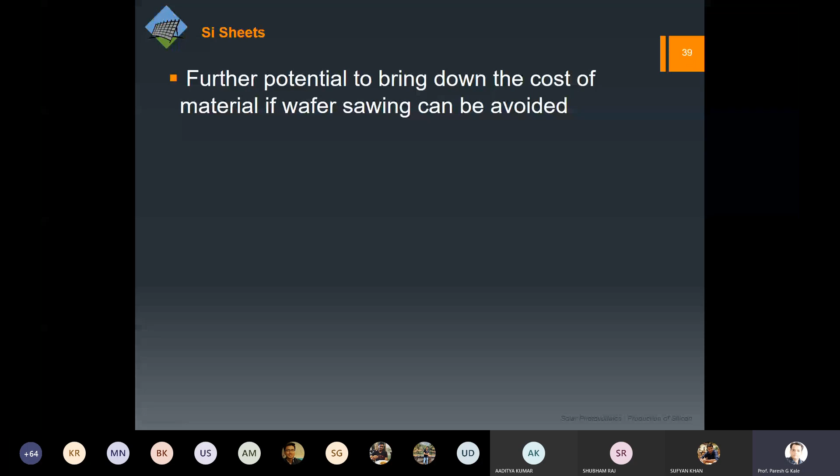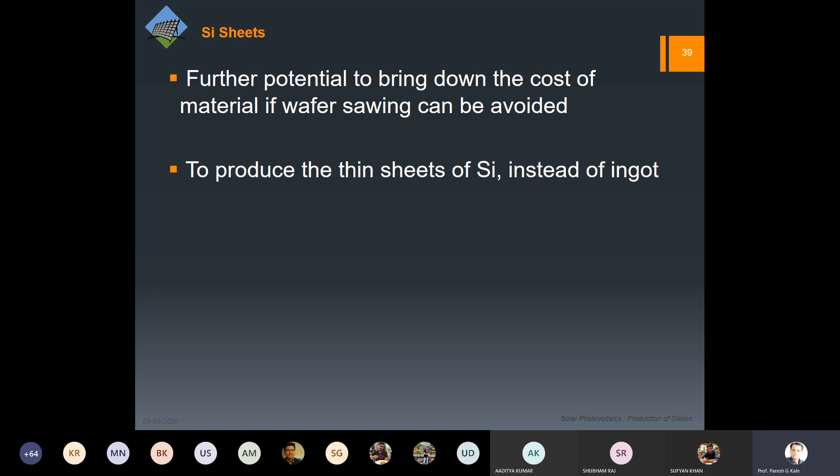So there are many methods available. People tried all sorts of things, but the point is that we were growing the sheets. The first two methods are literally growing the film. However, here the third one, you are making the sheets from the powder.

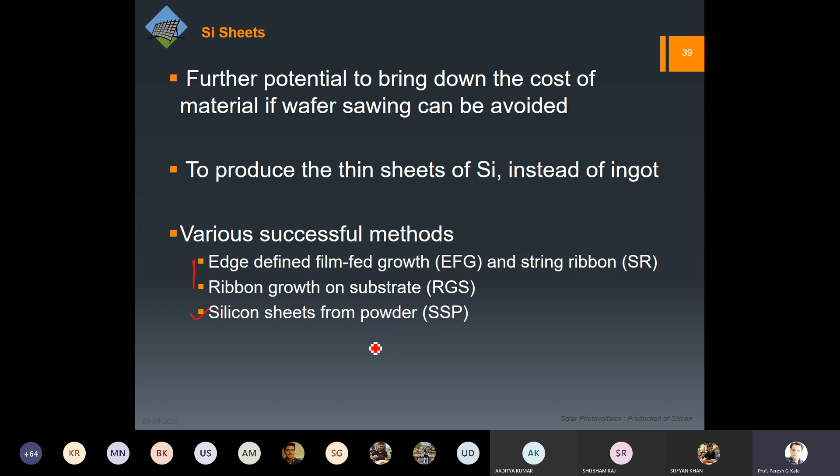So I told you, when this silicon wafer is cut, there is a kerf loss, which normally would be a powder. So with that powder, people were making the sheets. Let me show you a quick review of this.

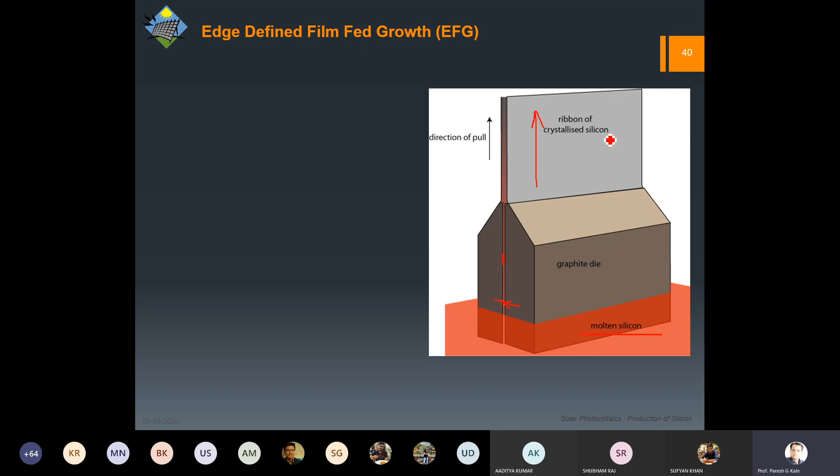This is edge-defined film-fed growth. Obviously we need molten silicon in pure form. However, we want a long sheet, so it is something like spooling. You have got a graphite die with a very small entrance or slit. So whenever you are pulling this molten silicon through this graphite die, you will have a very thin film of crystallized silicon. So this die is used.

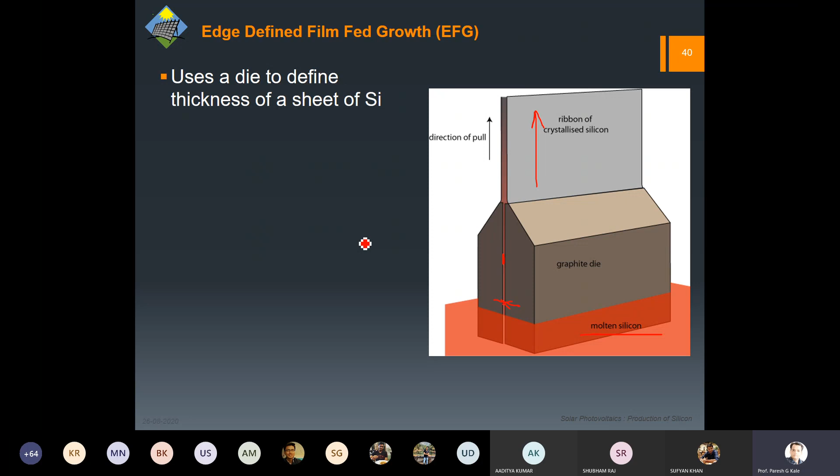So there is no cutting directly. The film is going up, and till you can pull a complete film, you can go ahead and have a large film.

However, the challenge here is the adjustment of the temperature profile, because here it is molten silicon at the bottom that we are pulling, and through this graphite there will be a gradient of temperature, and ultimately we have to cool it off. If you have learned some metallurgy, you will understand that this temperature-related process, sudden cooling or sudden heating, damages the microstructure of the material.

And during this process there go different defects, and also in this case it will cause the silicon which is crystallizing into the film to have large grains, a large number of grains. So all these things, the morphology and crystal structure of the material we are producing, are largely dependent on this transformation, translation in the temperatures.

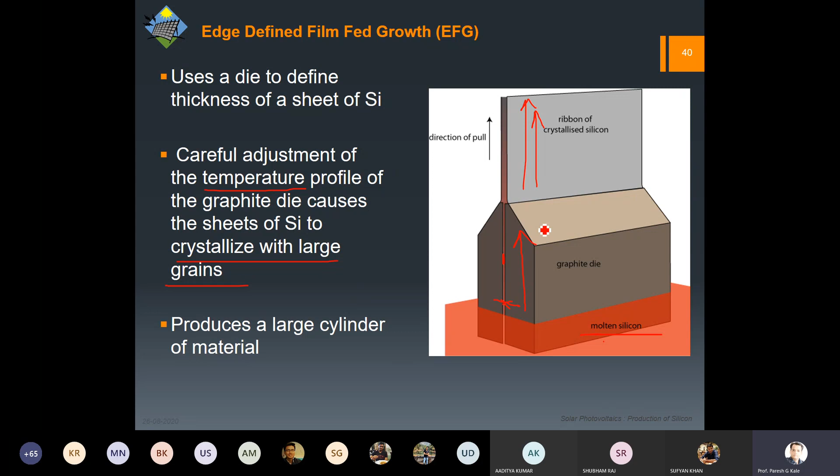However, it can produce large cylinder kind of material. I'll show you the picture here. You can see this is in 2D, so when we go for 3D, it is actually made in cylinder shape. What you have is a hollow cylinder, and you can see only thin shapes are there, which we can cut, provide flattening, and then use it as a film.

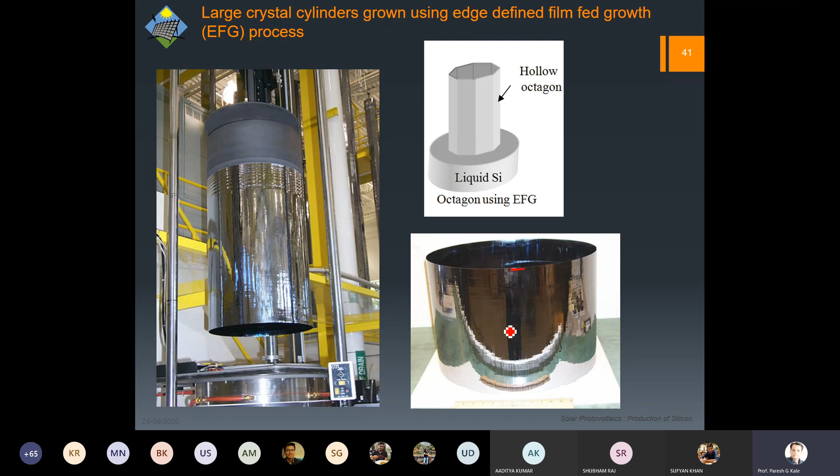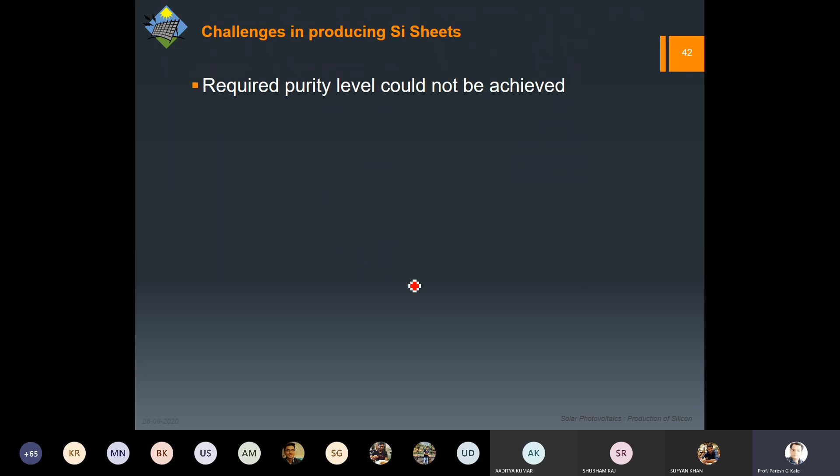So the challenges are: it requires a very high purity level which cannot be achieved because of this pulling process. Too many impurities are introduced by the apparatus itself, and many defects which create problems for efficiency are induced during the crystallization process.

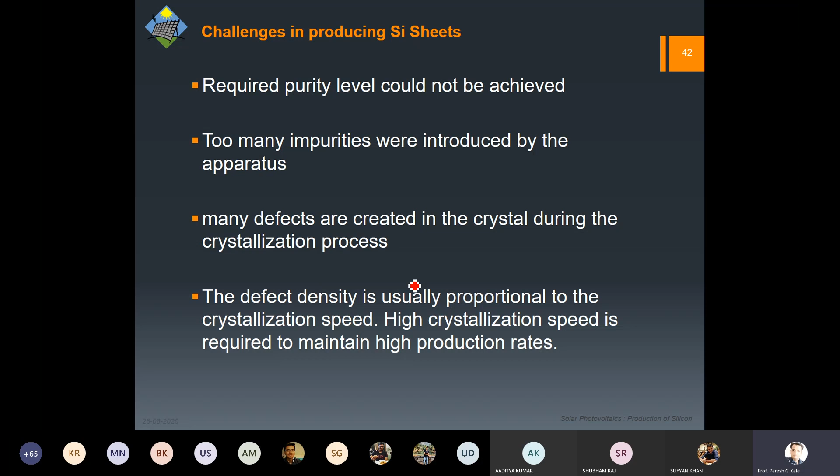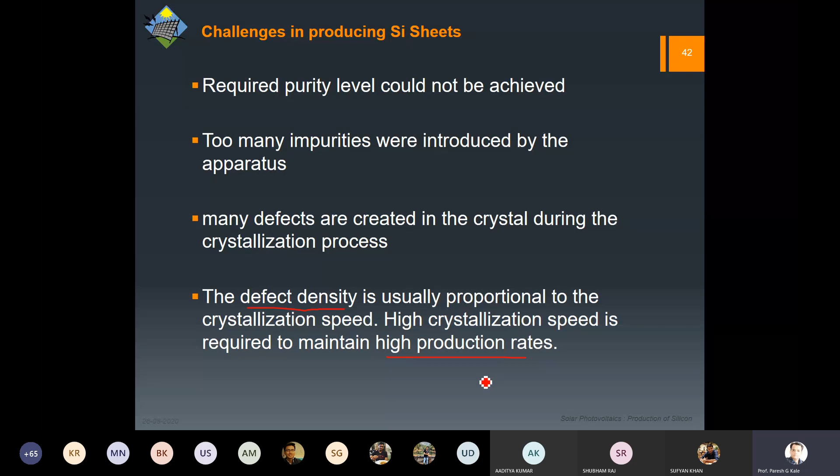And the defect density, as we have seen earlier, whenever you are making even the ingot, depends on what is the crystallization speed. There the crystallization was with depositing new silicon atoms on the seed, so something similar is happening here. It is again proportional to the speed with which I am pulling up the film. So if high production rates are to be maintained, we require high crystallization speed, and that is not going to happen - these are vice versa.

So these were the challenges, and that's why it was not too famous in the initial time. If you remember the graph from our first chapter, some time the production was increased, but then it proved out that it cannot be sustainable, and you really cannot bring down the prices. Rather, it's better to work on the monocrystalline or polycrystalline only. So still today more than 90% is dominated by mono and poly, not by this ribbon type and whatnot.

Other thing is the wastage itself. Now in solar cell industry, there are various places, various occasions where this wastage will be there, and at every stage we can send back that wastage for purification, or rather melting, so that it can be recycled in a simple sense.

Now the thing is, solar cell industry doesn't require much purified semiconductor, so obviously we can get that wastage from the electronic industry itself. Now you can ask me a question - why doesn't the electronic industry use the recycled one itself? Because whenever you are recycling, obviously new defects will be induced when you are processing.

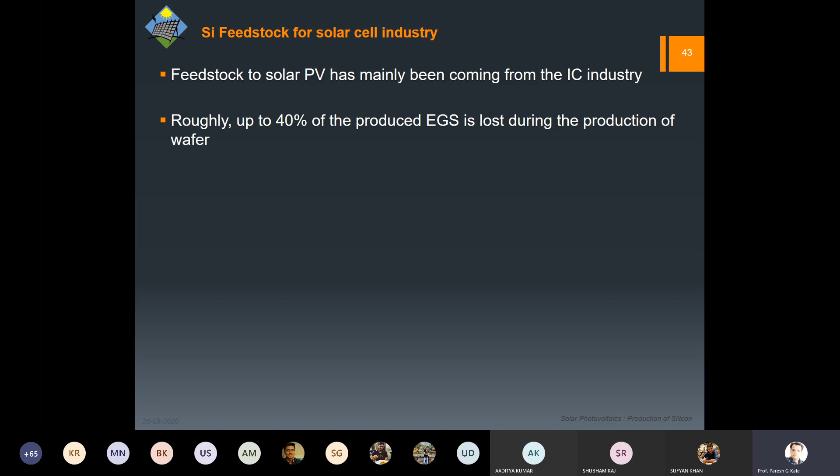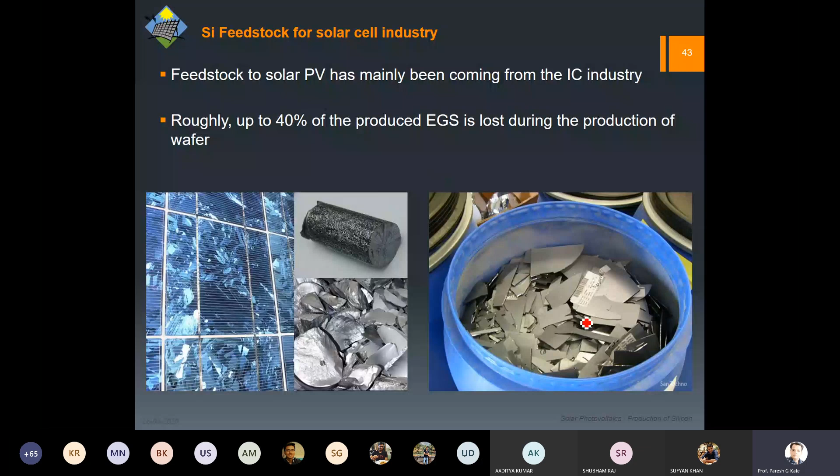It would be better to send defective material to the solar cell industry, where such defects can be accepted. In electronic grade silicon production, almost 40% is lost during wafer production. This includes material cut from the top and bottom of the ingot, and wafers that break during processing. All of this adds up to 40%, plus there are kerf losses, and quality control may also reject certain pieces.

So we can do that analysis. Let's say we have a given production capacity. I'm marking the steps in wafer making, and at every step, whatever is the wastage or discarded material, that is what I'm giving you.

When you are making polysilicon, you can have off-spec silicon which is not up to the mark—something has gone wrong with the process, doping may not have been proper, or some impurity is seen. These are discarded.

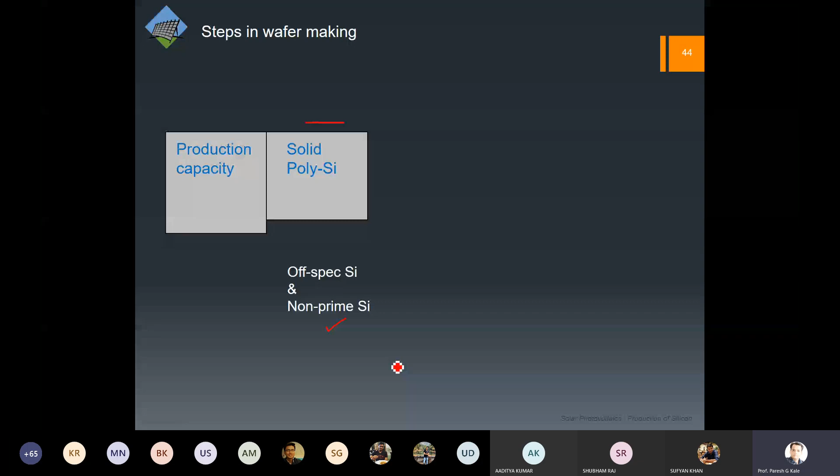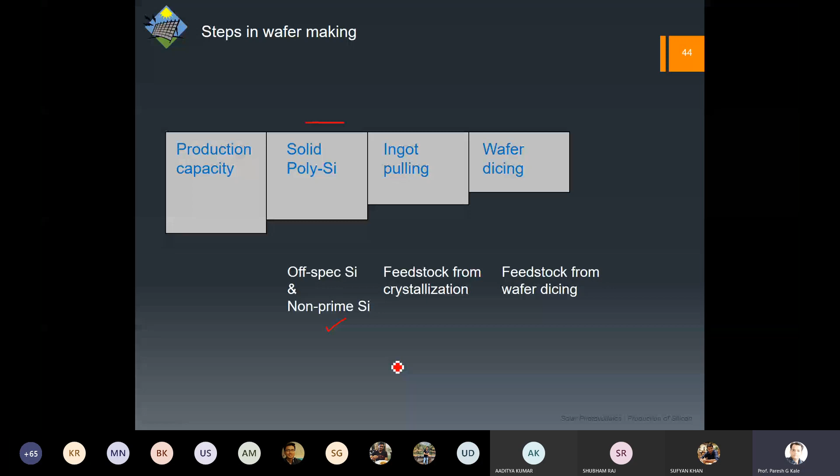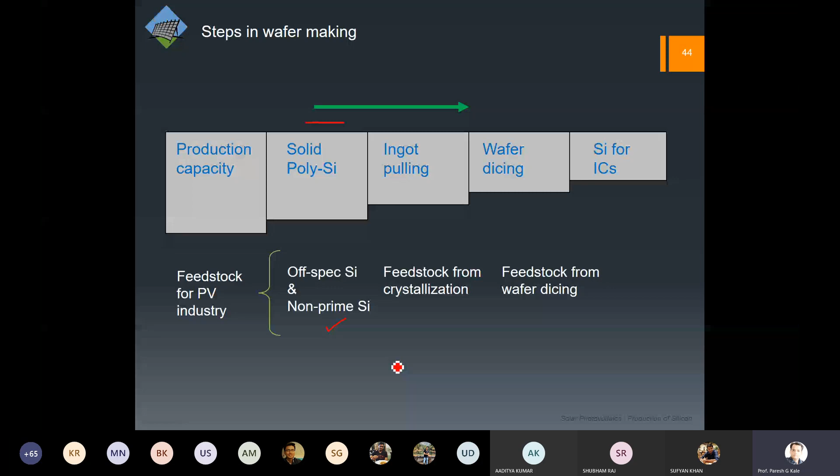Next, during ingot pulling, feedstock from the crystallization step can be given back. Then from wafer dicing, broken wafers or powder can also be given back. Ultimately you get silicon for ICs, but at every step, whatever waste we get can be used as feedstock for the PV industry.

That was for mono. We can go for poly as well—small chips and dust generated during the crushing process, then silicon deposited near the graphite electrodes. If you remember our reactors, some silicon is wasted, deposited inside the reactor itself, especially near the electrode, so that has to be scrubbed off.

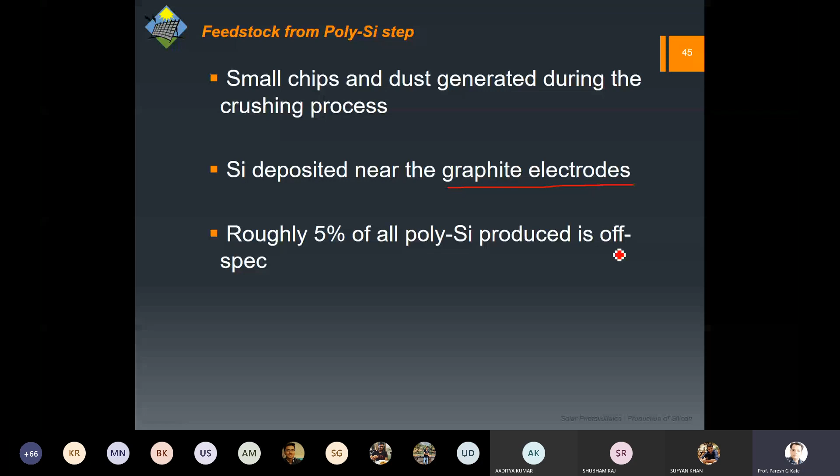But still it is much better compared to solar grade silicon. We've already discussed off-spec material. Then in FBR, some undersized beads and silicon dust is generated, which can also be utilized.

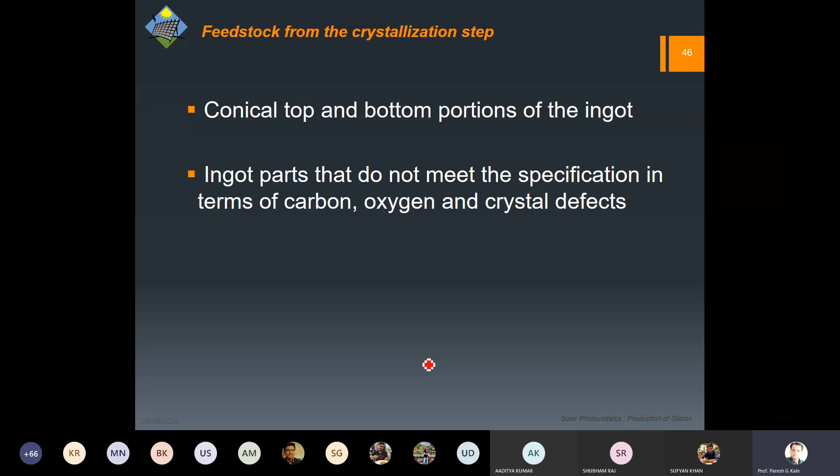Next is feedstock from the crystallization step—the conical top and bottom from the ingot, as I discussed, plus ingot parts that don't meet specification, for example defects coming from improper processing, or carbon or oxygen contamination. If there is oxidation, carbon can come from the earlier process itself. Then silicon remaining in the quartz crucible cannot be completely removed, so it's scrap, similar to what we saw from the reactor.

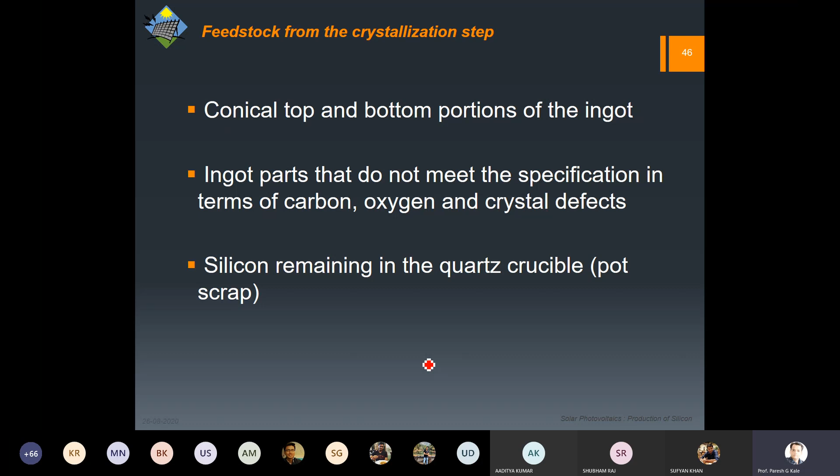Next is feedstock from the dicing step. Normally this yield is 90-95%, but wafers which are broken or damaged, out of dimensional tolerances, or warped or bowed due to heat treatments cannot be used for making modules.

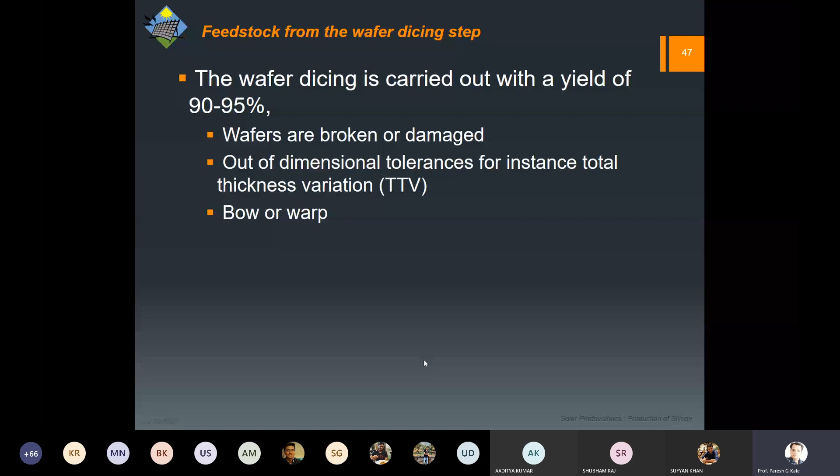This whole thing is always monitored for testing faults. Later, when we discuss actual solar cell fabrication, I'll explain how quality control is done—you can measure certain quantities, like the resistance in wafer making, and even find out where the defects are and how much the level of defects is. There are contactless techniques for characterizing wafers or solar cells.

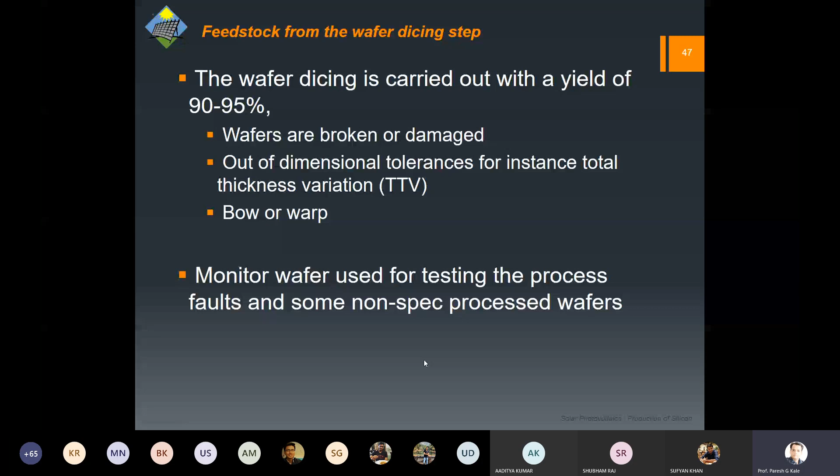We will have a separate lecture on that. You can have quality control at every stage, right from silicon purification to the solar cell, and even at the module level. So you test everything—individual cells are tested, and modules are also tested individually. We've already covered sawdust.

So the point is, when we go for solar grade silicon, it is less pure compared to electronic grade. Understand that monocrystalline is the best one, then polycrystalline, which has grains but is still high quality material. Solar grade silicon is much more impure compared to even polycrystalline. Polycrystalline has no impurity as such, but the grains decrease the efficiency—that is the whole problem. So we can take this as metallurgical grade, and this process is entirely different from whatever we have seen till this point.

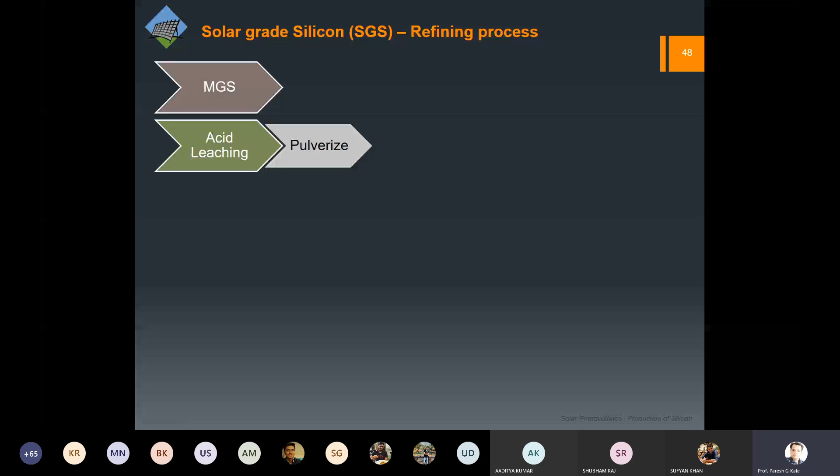So you take metallurgical grade, you don't go for ingot or something like that. You pulverize it so that most of the impurities would be removed with that acid itself. So you can see most of the metallic impurities are removed.

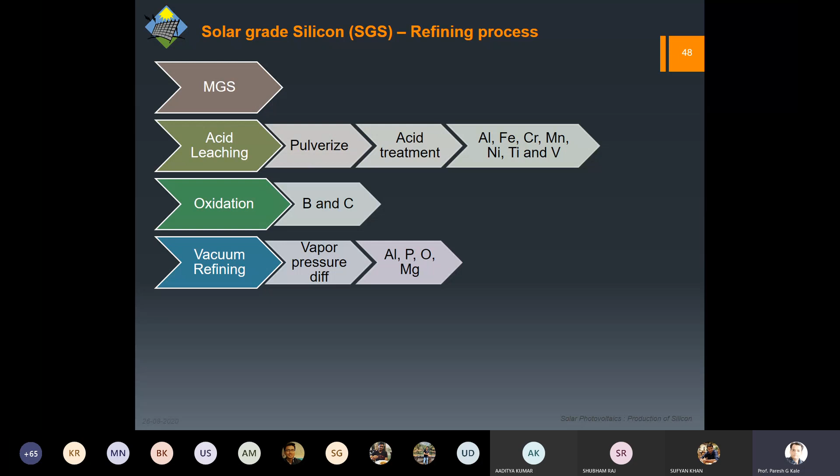Then you go for oxidation so that you can remove boron and carbon from that. Then you go for vacuum refining with the vapor pressure difference, and then you remove certain other materials like aluminum or phosphorus, oxygen, which is present from the previous steps.

And then ultimately the last process would be the solidification.

This process is important, and it is worked on something called as a segregation coefficient. We will see that there is something called as diffusion.

Every metal or every atom of an element will try to diffuse through the entire crystal structure of the material.

Let us say if there is some impurity, let us say phosphorus. Okay, so phosphorus will try to diffuse. This titanium will also try to diffuse out of it.

So whenever you are solidifying this metallurgical grade silicon, depending upon what is the segregation coefficient, these impurities are removed. The titanium will be removed faster, and all these metal materials have got a lower segregation coefficient, so that's why they would be removed.

They will automatically come to the surface. They diffuse from the inner side to the surface, and when you remove the surfaces, you treat the surfaces, the impurities are gone, and you can use this coefficient so that you improve or purify by this solidification.

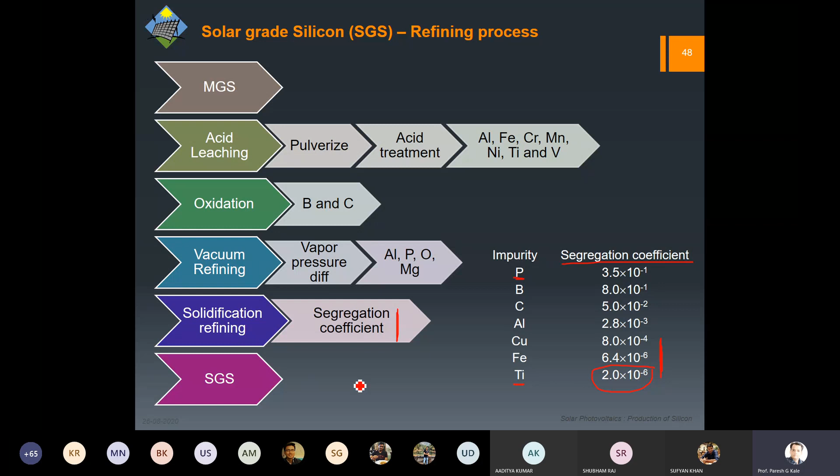So you can see here we are not going for the processes like earlier, but it is on similar lines. And of course, you do solidify so that after that you go for slicing in the way you want.

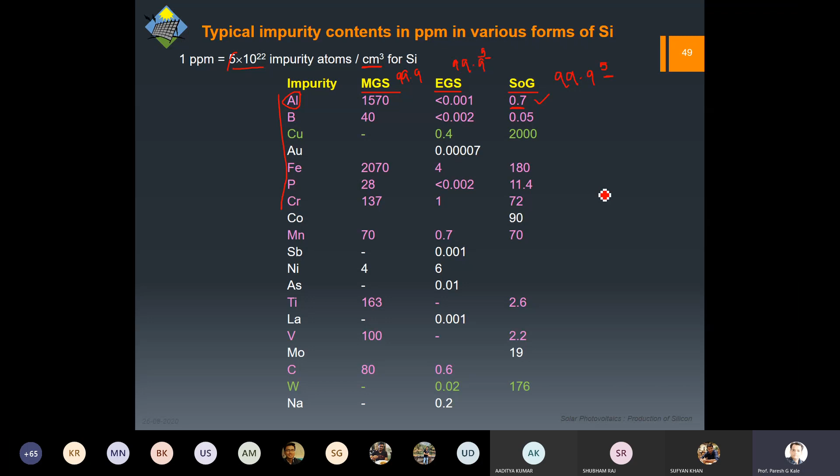This 4-digit difference is what we can compromise with. So that is what reduces the cost. However, it reduces the efficiency as well, and that is the compromise we are talking about.

So the importance is SGS. SGS would be available at much cheaper prices.

EGS availability would be much difficult, because to produce that much of EGS in a very high quantity would be difficult. It would be time consuming as well.

So that's why whenever the EGS was controlled and there was a problem with the supply chain, people thought of going for thin film technologies or solar grade and whatnot. So this shortage obviously hampered the production, and that's why we went for some other ways.

Already I have shown you in one of the graphs that silicon usage has come down in solar cell industry. Apart from that, the cost itself has come down.

But still that cost has to go down, because still the complete module is 60% of the power plant cost. Okay, so the processing and the raw material itself is quite costly.

So we require some additional sources of silicon, or new methods of looking at silicon, using that silicon, so that the cost would be down.

There is another thing as well. The silicon solar cell growth is much higher.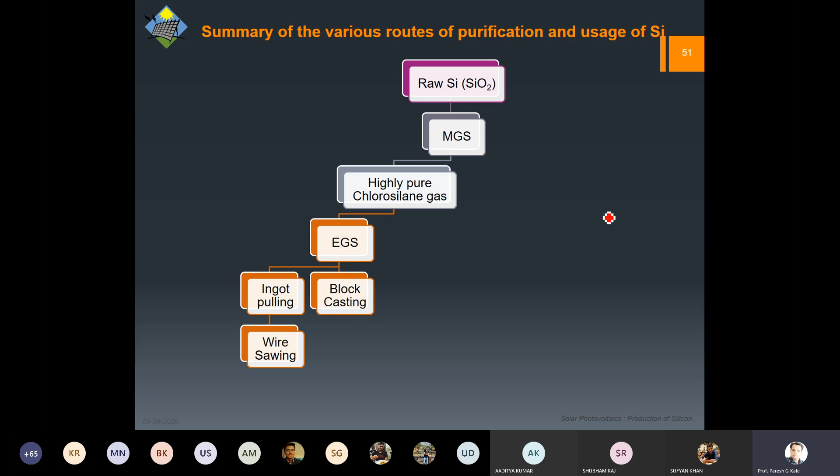So let us summarize the various routes of purification. We start with SiO2, we get metallurgical grade. Then we have two routes: we can go with purification of chlorosilane to get EGS. That EGS we can turn into ingot, and after that we can have wire sawing, or we can go for block casting, but ultimately you have to cut it. As far as sheets are concerned, you can use laser cut because you have to cut maybe once or twice only. Laser cutting is not possible with the ingot, at least not that I've heard of.

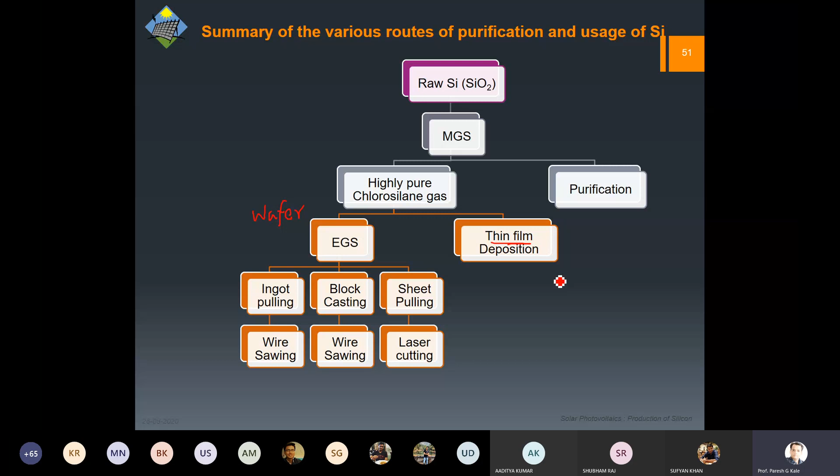The other thing is, if you have chlorosilane gas, you can go for thin film deposition. Wherever we get this ultimately as a wafer, we call it wafer technology, and when we deposit thin film, we call it thin film technology. Other thing is, the same chlorosilane gas, you can go for purification and get solar grade silicon - that's what the last slide talked about. But again, this is a wafer technology, only you use solar grade silicon instead of electronic grade silicon.

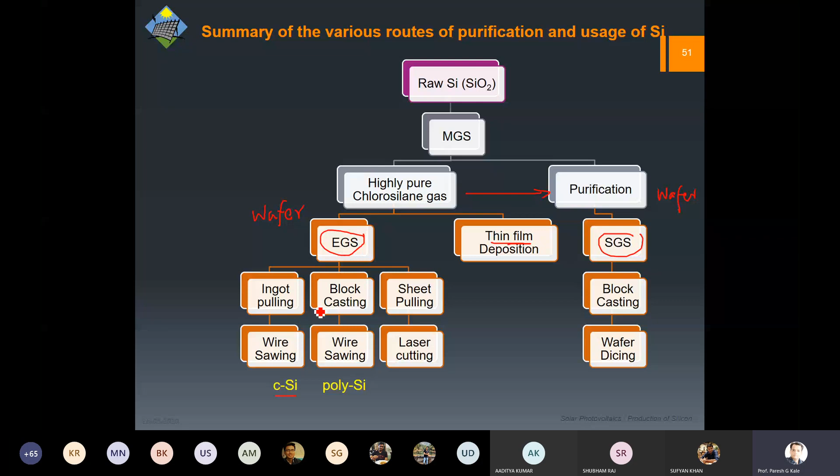So depending upon which route you follow, you will get a different kind of silicon type. When we are going for ingot pulling, you get crystalline silicon, but in block casting you get polysilicon, and in sheets obviously you get silicon sheets. Thin film depositions are second and third generation solar cells, and here you get SGS type of wafers.

So it is all about playing with the cost. Everything you do or drop in the whole process is going to increase or decrease the cost of the ultimate product, the solar cell. That's why these things are very sensitive. Not only to the step, even if two companies are adopting very similar steps, it would still be very sensitive to temperature, how you control the profile of doping, how you control the impurities.

Let us say hypothetically one company is using 50-degree higher temperature. With that, let's say you are driving out more impurities, so your efficiency will go up. However, this additional 50-degree means the energy cost will go up - we are not talking about 0 to 50 degrees, we are talking about 1000 degrees to 1050 degrees. So that additional 50-degree is a huge energy cost, and that's why these industries are quite energy sensitive. One has to look at that aspect as well - whenever I increase 10 degrees, how much does the energy budget go up. So optimization is the core thing in solar cell, and as our subject progresses, you will understand how many parameters we have to look at so that we can optimize the solar cell production.

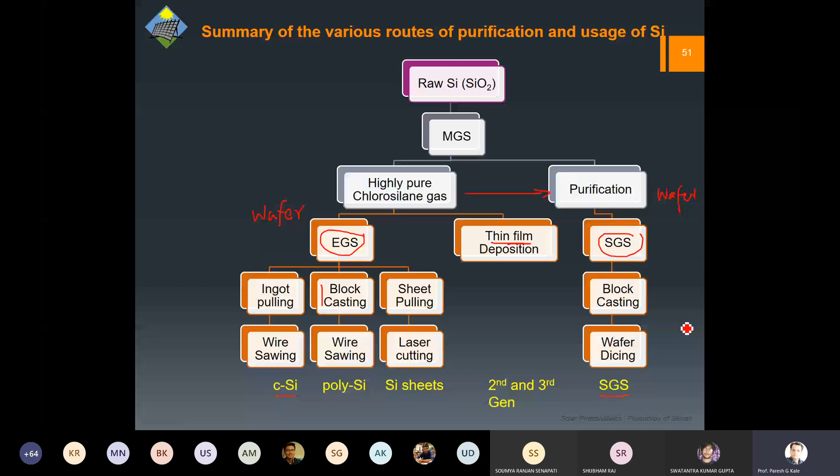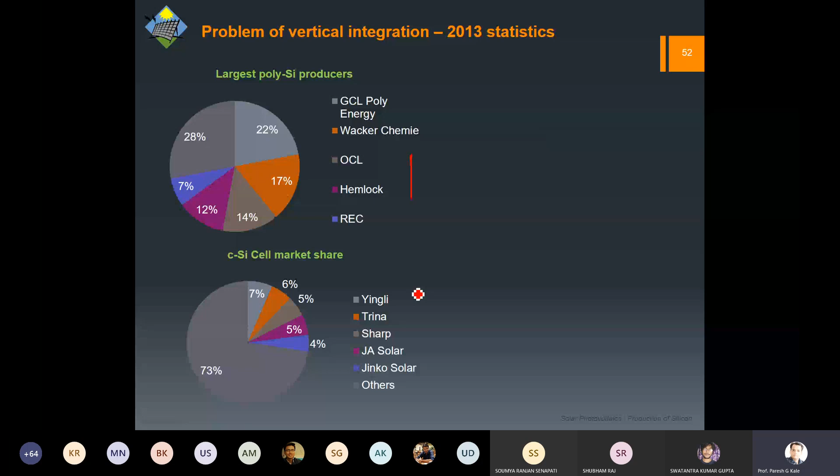Already I have talked about vertical integration. These are old statistics, but I'm listing some companies for information. These are the largest polysilicon producers, and these are the crystalline silicon cell market shares. So the companies on top are producing the material, but these companies are producing the solar cells—and none of them are common. Important names include Sharp, Jinko Solar, Trina, and Yingli. These are very important producers, and most of them are China based.

The industry has taken note of this vertical integration problem. For example, Trina—they are coming up with 600-watt models and vertically integrating at least some part of it. They produce about 8 gigawatts, such a huge production, so slowly they are coming up. Now I think they have planned about 1 gigawatt of vertical integration, because they have to transform the whole business, and their business model is entirely going to change. You don't do it overnight.

It takes a long time for something like this to happen. Now you might have heard about Reliance—Reliance is buying so many things, Netmeds, and they started JioMart. They took Jio and started all this with Jio.

But do you know, Mukesh Ambani actually announced in 2018 that they were going to change their business model? It took about 2 to 2.5 years to complete the whole process, step by step, starting with Jio, then going with Google, Facebook, and so many investments, and then changing the model. If you had listened two years back to what Mukesh Ambani's vision was, then it's not surprising what he has done. He had already told that he would be in retail—he announced that by 2021 he would make local Kirana stores digital. That is what he's aiming for, and that is very different from Amazon's model.

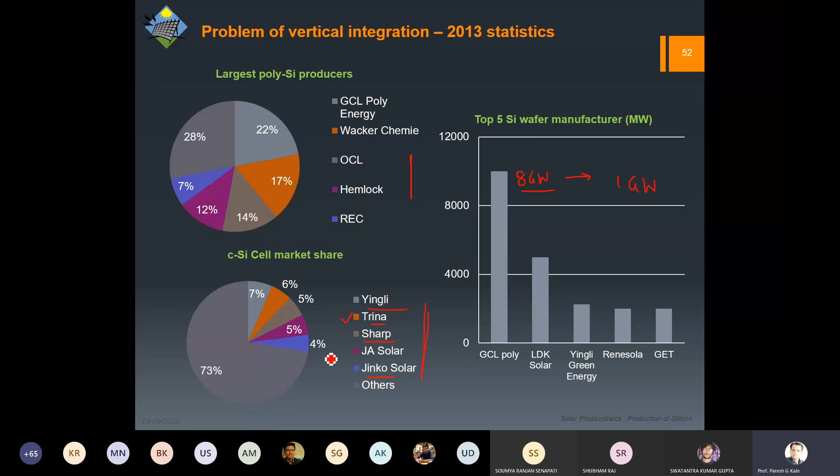So the business model is really important whenever you are talking about such businesses. You should understand that is the core of any business.

Okay, so that's all from this particular chapter. It's already 6 o'clock, so I'll stop here because the chapter is over.

Our next chapter - so we have talked about materials, we have talked about how it is manufactured. Now obviously the next thing would be the electronics, the semiconductor part itself. So we will try to learn about that, and that would help us when we learn about solar cells and how exactly we are going to optimize based on whatever we are learning. So knowledge at every stage would be helpful in the next stage, obviously.

Okay, so any questions, any comments?

Yeah, any questions, any comments? Sir, the segregation coefficient is used to remove the solid, the metallic impurities. Yes, right, because every material will have different segregation coefficients, so depending upon that you can push out, wipe out the impurities.